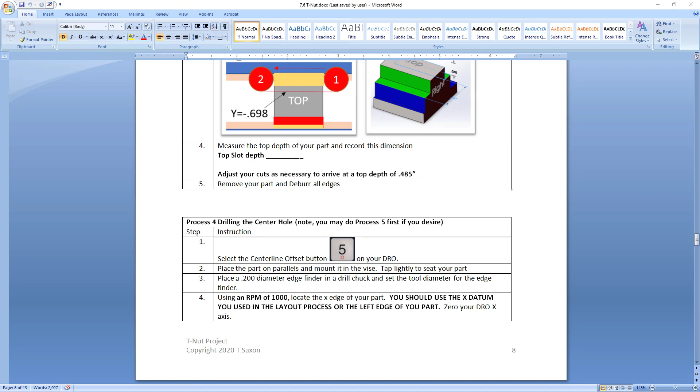To get this part rolling, what we have to do is look at the print first. So we'll pull that up. You'll see in the center of the part, you've got a threaded hole. This is a 3/8-16, or Unified National Coarse Thread, hole that we use in the hold down clamp kit to utilize this T-nut in the drill press slots.

This hole is located 0.500 thousandths from the left edge and 0.425 thousandths from the bottom edge, or in the center of the part, if you do the math. You'll notice that the hole goes all the way through, and the hole size is 0.313.

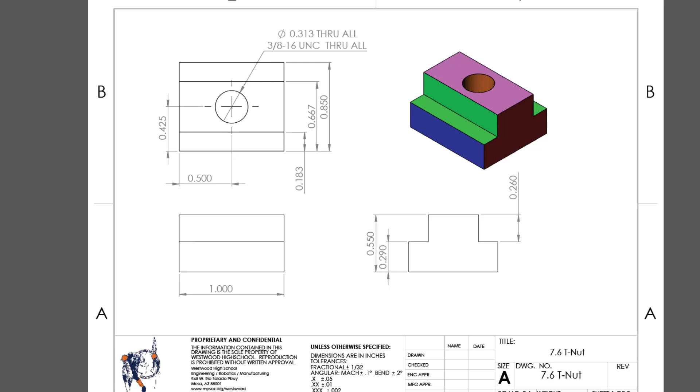Now that's given for us, but what if that hole dimension was not necessarily explicitly stated? In that instance, what we would have to do is look up the proper hole size to tap a 3/8-16 coarse thread, using wall charts or Machinery's Handbook.

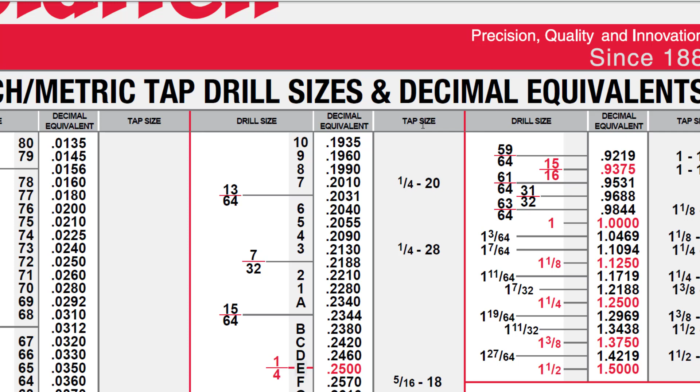I'll show you the wall chart here. So this is the wall chart. The way you read this, you just come down and find the tap size. I happen to be in the middle column because I know that's where a 3/8-16 thread is. I can come down here and find a 3/8-16. The corresponding drill that's adjacent to it is a 5/16, or 0.3125. That is the standard drill to use for a standard fitment of a 3/8-16 bolt.

You can also use Machinery's Handbook, or the formulas, to compute that drill diameter.

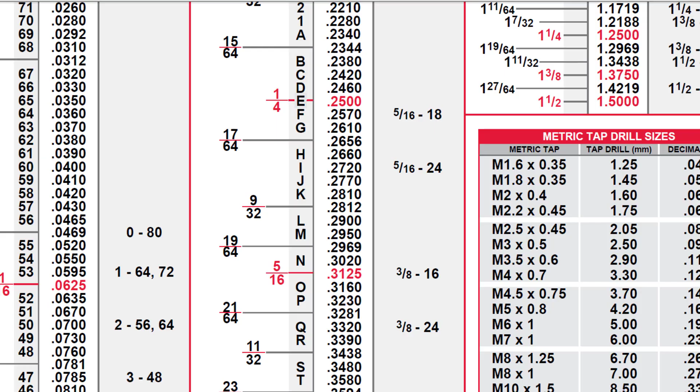So if you reference your instructions, you'll see that the very first thing you want to do is set the Centerline Offset button to 5 on your DRO. Basically that means that you're not going to use any tool compensation.

Once you have that set, go ahead and put your part on a parallel and mount it into the vise. You want to seat your part into the vise and then put the edge finder into a drill chuck, and put that drill chuck into the collet holder.

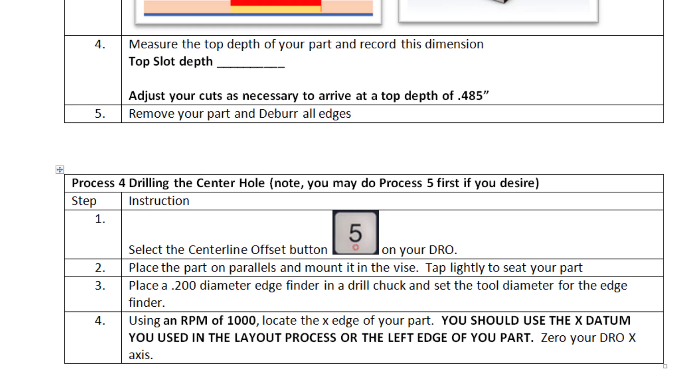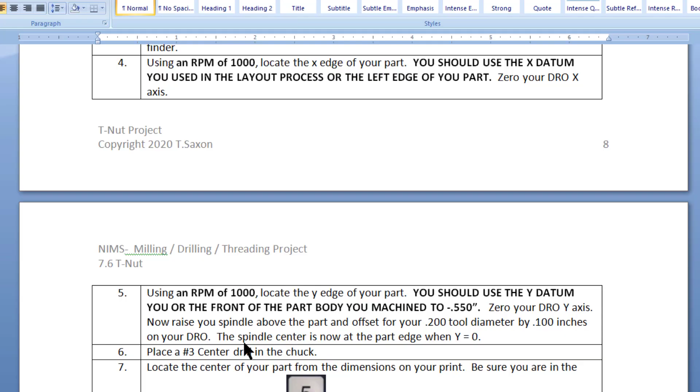We're going to find the left edge and the bottom edge of the part. So first up, you want to select the tool button on your DRO and set the diameter of the edge finder, 0.200. Once you've set the diameter for your edge finder, you'll want to use it and the DRO to find the left hand and bottom edges of the part. That will be your X and Y zero.

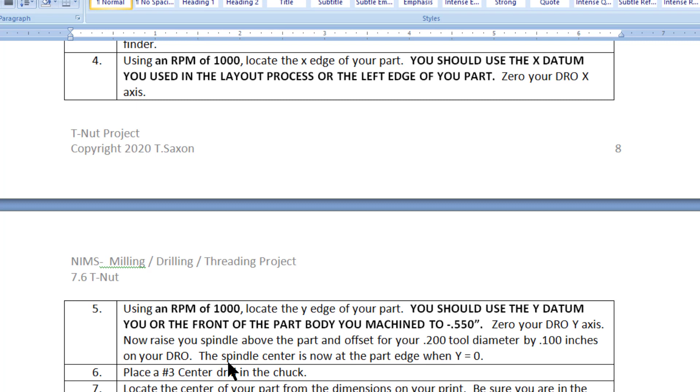After you've found those edges, go ahead and place a number 3 center drill in the chuck. Once you have that in the drill chuck, you'll want to locate the center of the hole. You'll dial in 0.500 in X, 0.425 in Y. Give a good visual check. It should look like it's about in the middle of the part, as this picture depicts.

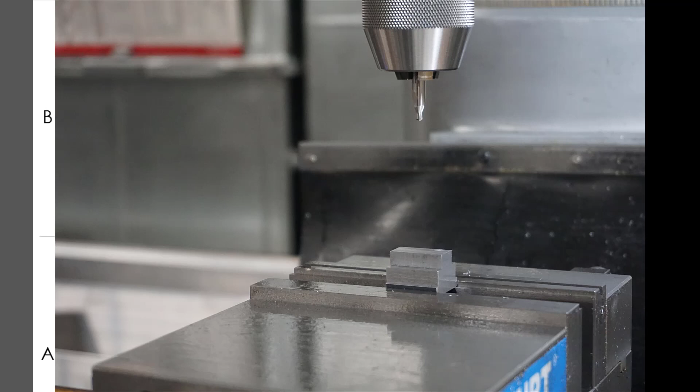Once you're over the top of the part, you're going to want to go ahead and apply a little bit of lubricant, come down and spot drill your hole. Remember, this is just a starter hole for the 0.313 drill bit, or the 5/16 drill bit. One smooth cut.

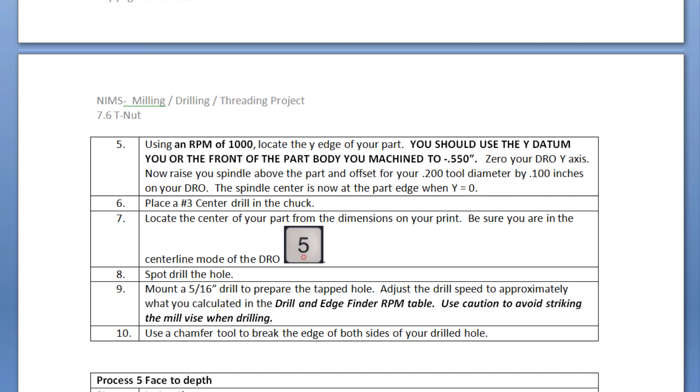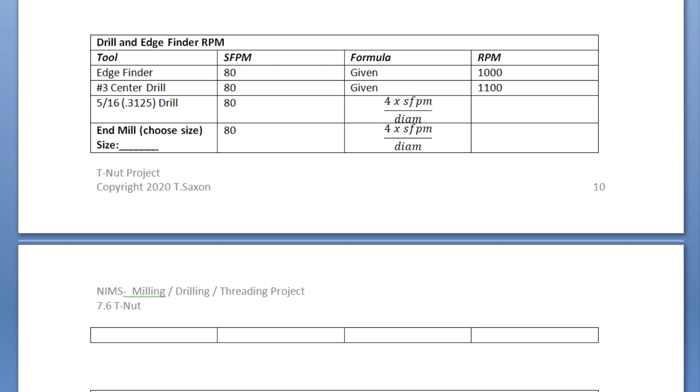Now that we've got the hole started, we're going to go ahead and drill with a 5/16 drill. Mount that into the drill chuck and check back to the back table for the calculated speed. Your speeds are based on 80 surface feet per minute. You should have completed this table prior to starting your part. Set that and commence drilling your hole. We'll use a peck drilling technique. Let's watch the video.

Before you start, be sure that you apply plenty of cutting fluid. We'll spin up our drill bit to our computed speed, come down, make contact with the surface, and apply a moderate amount of pressure. Remember, we're looking for chips to form. Those chips should be straw colored as they come off, not blue. If they're really hot, really blue, it means you're drilling too fast or you don't have any cutting fluid on there.

Pause after drilling about a third of the way through and apply some more cutting fluid. You'll need to do this at least once, maybe twice.

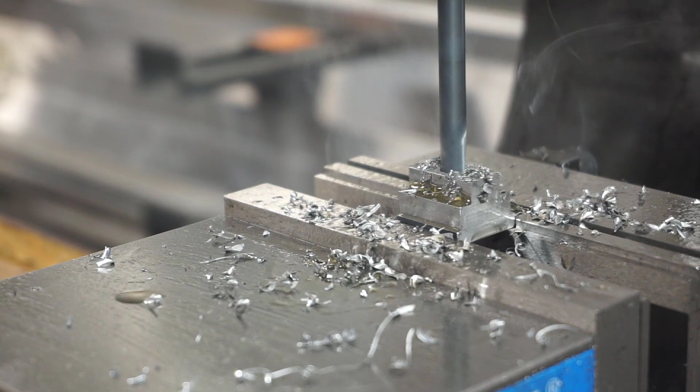Be ready for the drill to break through the bottom of the part. And I've drilled completely through the part. At this point, your part should look something like the picture above.

What you're going to need to do now is to remove it from the vise, deburr all edges, and also put a chamfer, just like what's shown on the top and bottom of the hole. This will help you to start the tap straight and to make a nice clean thread.